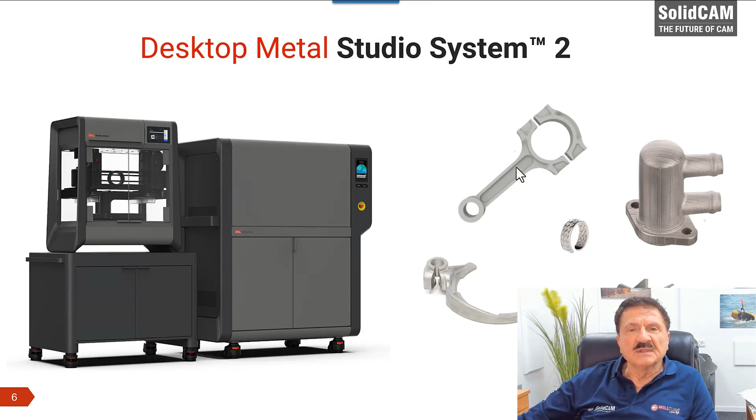The Desktop Metal Studio 2 system has two parts, the 3D printer and the furnace. It's an office-friendly production of metal prototypes and one-off parts. We share examples of parts produced with Studio 2: a gear fixture, an atomizer, and some gears.

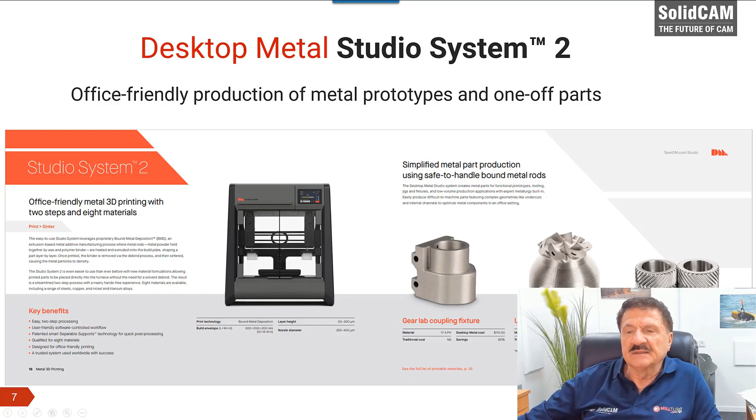Okay, what are the qualities of the Studio 2 system? First of all, it's an office-friendly metal 3D printing in just two steps: print and sinter. What about the printer? Unlike laser-based systems that selectively melt metal powder, the Studio system extrudes bound metal rods, similar to how an FDM printer works.

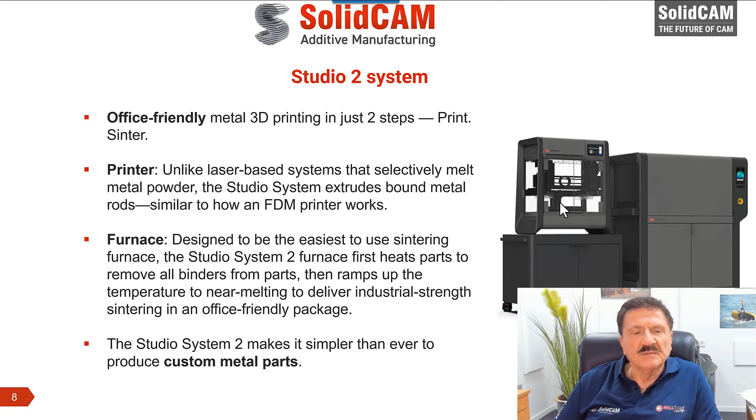About the furnace, it is designed to be the easiest to use sintering furnace. So the Studio 2 system furnace first heats parts to remove all binders from parts, then ramps up the temperature to near melting to deliver industrial strength sintering to an office-friendly package. So we can use the Studio system to produce custom metal parts. The second system that we are interested in is the Desktop Metal Shop system.

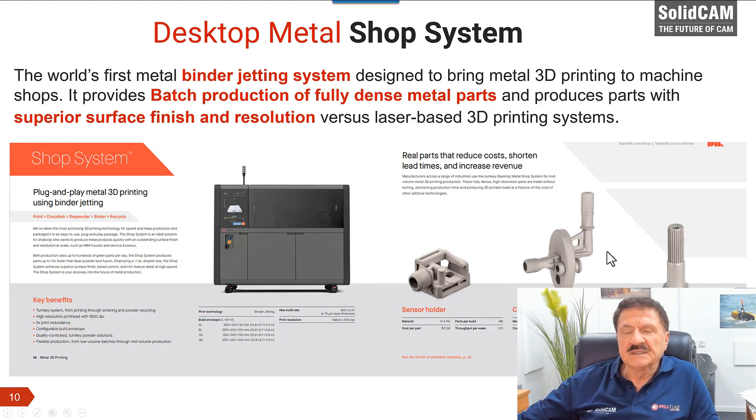This is the world's first metal binder jetting system, designed to bring metal 3D printing to machine shops. It provides batch production of fully dense metal parts and produces parts with superior surface finish and resolution versus laser-based 3D printing systems. See here on the bottom right examples of parts printed with the shop system.

The shop system printer features the most advanced printhead on the market with over 70,000 nozzles to achieve high-resolution 3D printed parts at a fraction of the cost of laser-based additive systems. Designed with the modern machine shop in mind, the shop system is built to fit seamlessly into the machine shop workflow. It produces parts with superior surface finish and resolution versus laser-based 3D printing.

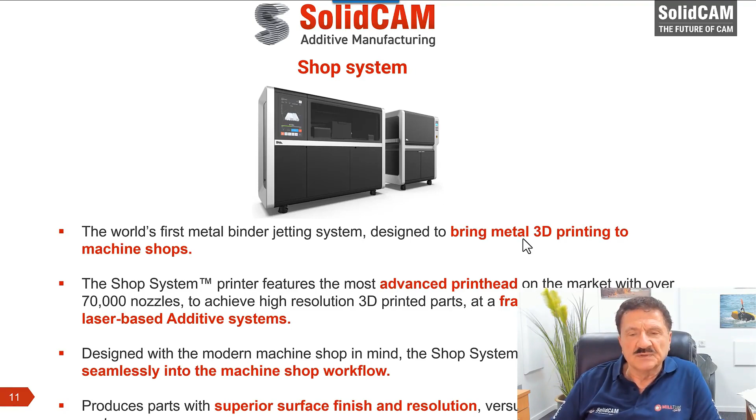What are the uses of additive manufacturing? First, rapid prototyping. Quickly 3D print functional prototypes and thus reduce product development timelines. The Studio system is perfect for this task.

Second, mass production. Produce hundreds of thousands of parts with no tooling required. The shop system is perfect for this purpose. And then the third use of additive manufacturing is manufacturing tooling, to simplify the manufacturing process and reduce lead times for end-use parts.

Desktop Metal have another line of equipment called ETEC systems. They have the ability to mass produce polymer parts with the speed and quality needed for demanding end-use applications. They deliver parts with exceptional accuracy, superior part properties, fine feature detail, and smooth surface finish, at a scale and cost that is competitive with traditional manufacturing techniques like injection molding. See here in the bottom right the different sizes of the ETEC systems.

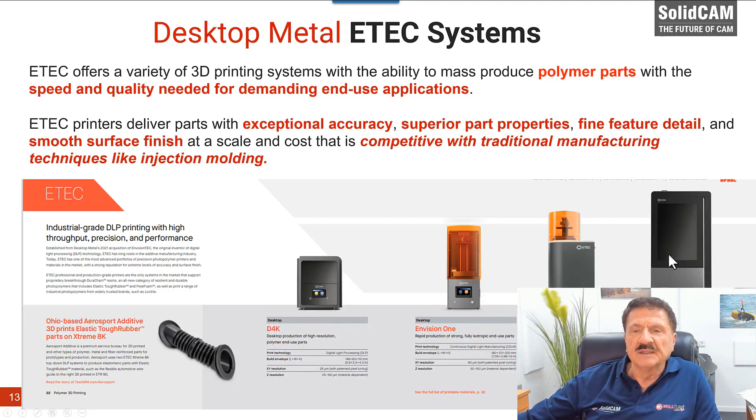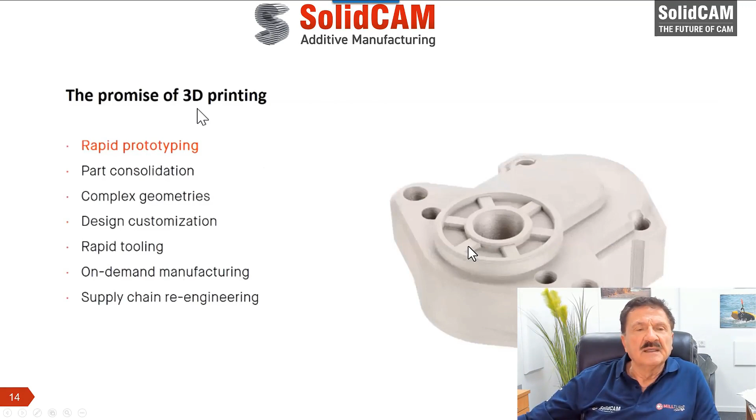So, to summarize, what are the uses for 3D printing? First, rapid prototyping. This has been the most common use for the last 20 years for 3D printing. Second is part consolidation. You see, sometimes to create an assembly, you have to CNC each part of the assembly and then combine them together to make the assembly.

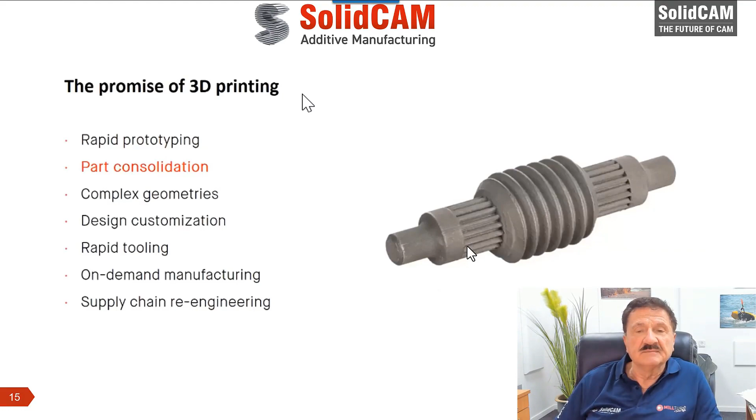In 3D printing, you could print the whole assembly as one piece. So it's a good example of part consolidation. With 3D printing, you can do complex geometries that can never be done through CNC. Here you see an example of such a part that was produced with 3D printing.

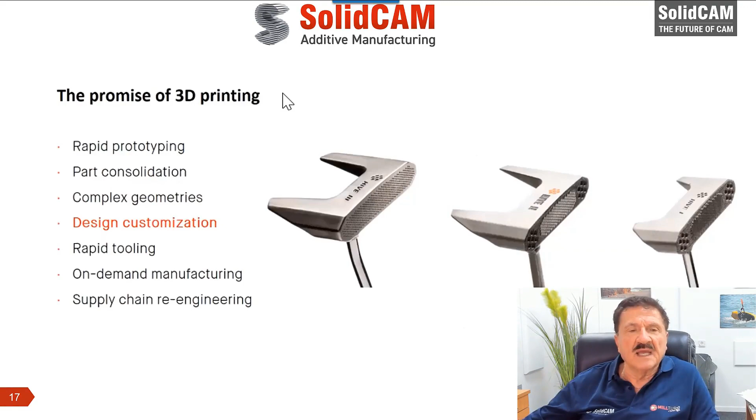Next, design customization. You know, these days when somebody makes a design and then does a prototype, he looks at it and then wants a change, and prints it again and again. So using 3D printing can help you do design customization. And as I mentioned before, with 3D printing you can produce rapid tooling.

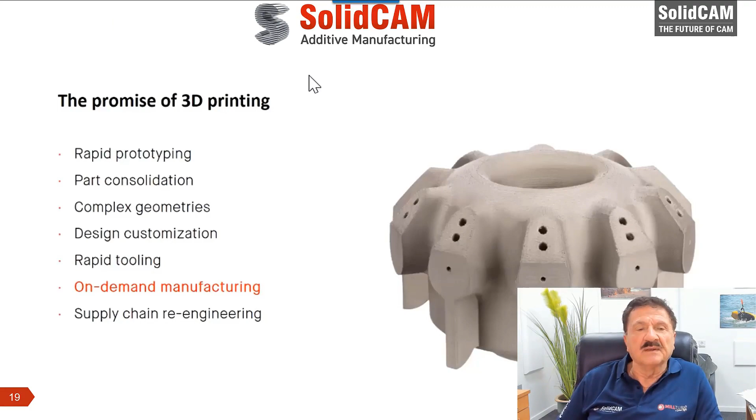On-demand manufacturing. So today, if you have the 3D model of the part and you have a location where you can 3D print it, you can simply, whenever you need a number of these parts, just 3D print them. That's what we call on-demand manufacturing.

Supply chain re-engineering. Basically today, you don't have to produce CNC parts in China and ship them to the United States. You can simply print them where you need them, in the United States.

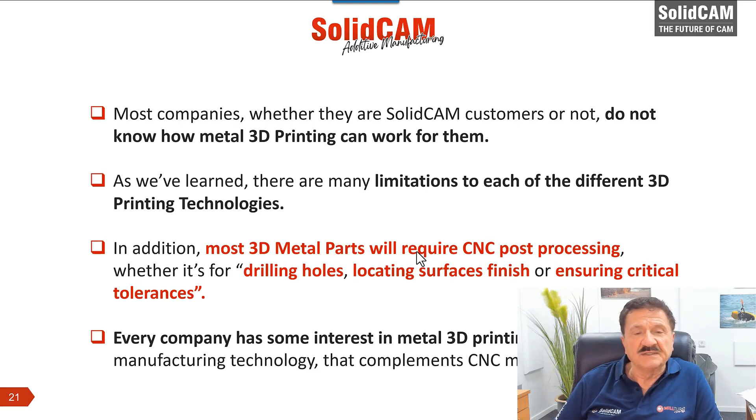So, to look at the complete picture, most companies today, whether they are SolidCAM customers or not—I'm talking about CNC machine shops—they really do not know how metal 3D printing can work for them. Also, as we've learned, there are many limitations to each of the different 3D printing technologies. In addition, most 3D metal parts will require CNC post-processing, whether it's for drilling holes, locating surfaces, finish, or ensuring critical tolerances. Basically, every machine shop or company that does manufacturing has some interest in metal 3D printing. It's a new manufacturing technology, and it complements CNC machining.

So, SolidCAM's task is to educate and guide its current CNC customers in 3D metal printing. We know the limitations and where this 3D printing technology excels. So, same as we provide practical technical support to SolidCAM customers for CNC machining, we offer the same for 3D metal printing. We can investigate a part and decide whether this can be done with 3D metal printing or not, and how much cost saving can be achieved with 3D metal printing, and what CNC post-processing is required.

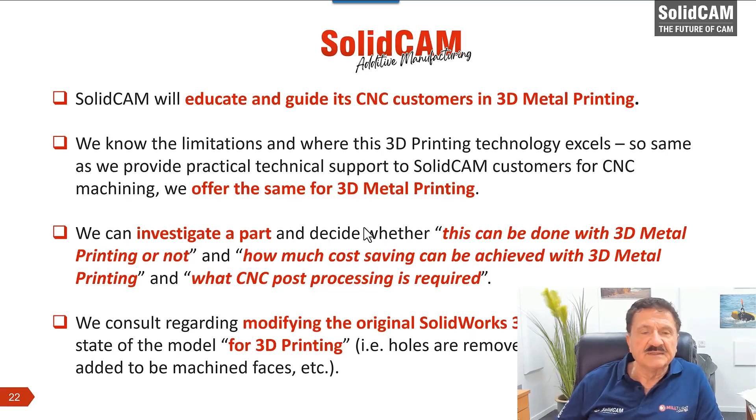We can also consult companies regarding modifying the original SolidWorks design model, so we get a state of the model ready for 3D printing. This means holes are removed, additional material added to the machined faces, and other changes.

So, how are we going to interact with our current customer? By taking real parts from you, we investigate how to integrate 3D printing in the process to manufacture your parts. There are several different approaches. We just get parts from you for the purpose of studying them and understanding where 3D printing can be useful. We can also 3D print parts for you as a service in our additive and CNC technology centers.

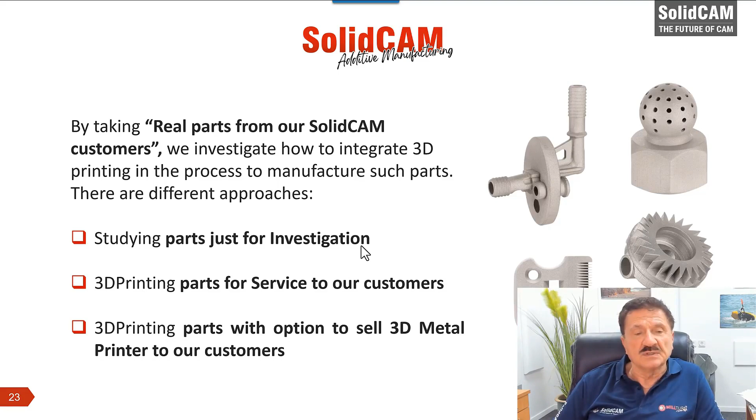Also, once you see the value of 3D printing, we can obviously also sell you the 3D printer system. A customer of SolidCAM in Germany called VMR gives services ranging from 3D printing with metal and additive manufacturing in plastic to design, mold making and plastic injection molding, to CNC machining with milling and turning. VMR has 9 seats of SolidCAM and does metal 3D printing since 2014 with SLM and Renishaw laser metal printers.

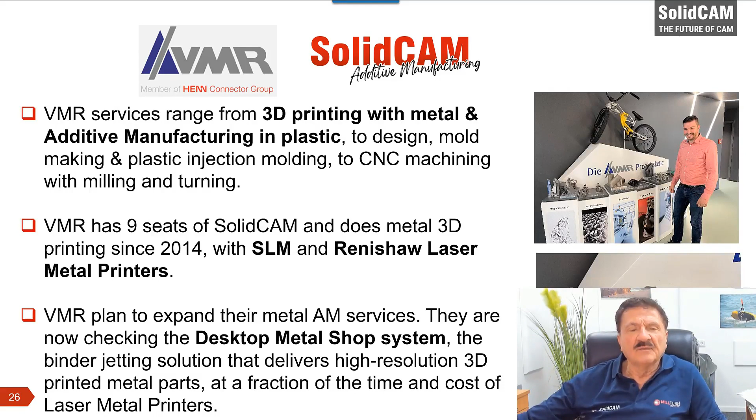VMR plans to expand their metal AM services. They are now checking the Desktop Metal Shop System, the binder jetting solution that delivers high resolution 3D printed metal parts at a fraction of the time and cost of laser metal printers.

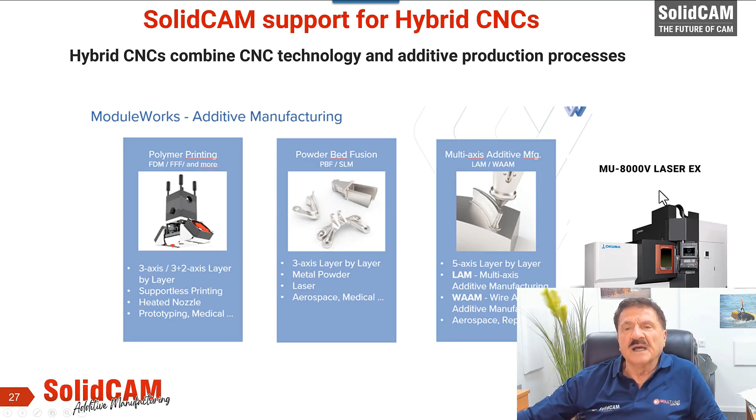Another area we are developing in SolidCAM is support for hybrid CNCs. Hybrid CNCs combine CNC technology and additive production processes. They have basically a regular milling head, and they also have a laser head to do 3D printing. We are going to support polymer printing, powder bed fusion, and also multi-axis additive manufacturing. You see here on the right the Okuma MU-8000V Laser EX, an example of a hybrid CNC machine.

Here is an example of one of those centers, our SolidCAM CNC plus additive Schramberg Technology Center. It's in the city of Schramberg, 1 hour south of Stuttgart in Germany. Here we see on the left the Shop System installed there. We see on the right the Studio System, and on the bottom right other components of the Shop System.

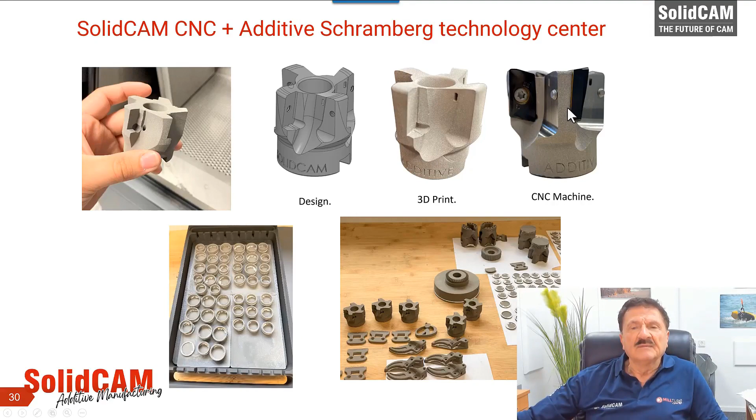You see here what we can do, the whole process which involves designing a custom tool. Here is a picture of the design, done in SolidWorks. Then we 3D printed it with the Shop System, and then we did CNC machining for creating holes and finishing surfaces.

Let's see now a video of this whole process of a custom cutting tool from design to finished part.

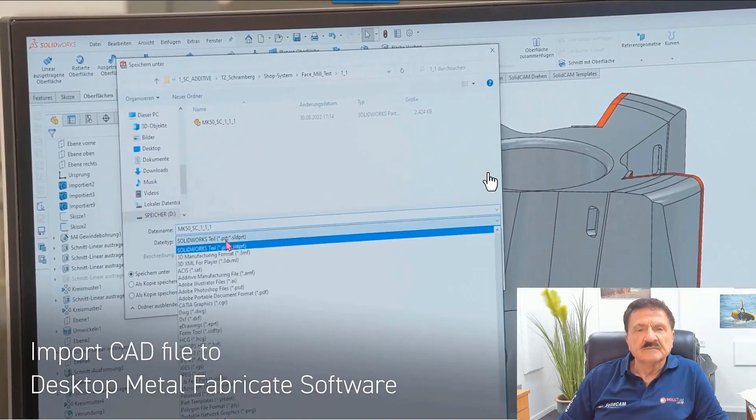Here we see the design of the custom tool in SolidWorks, preparing it for the Shop System.

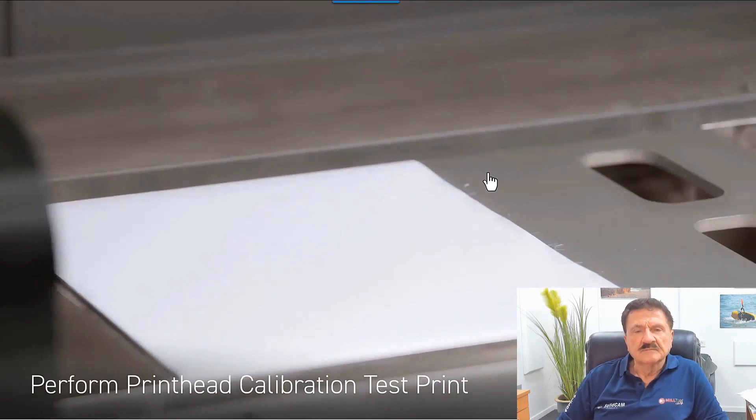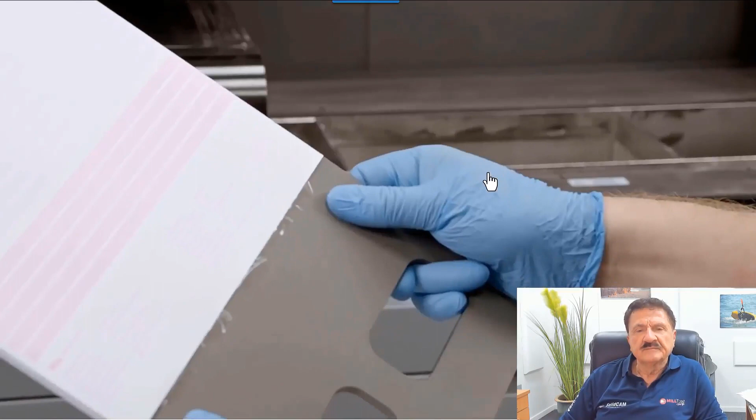This is the Shop System that has 70,000 nozzles that I explained. Here we're starting to print the parts.

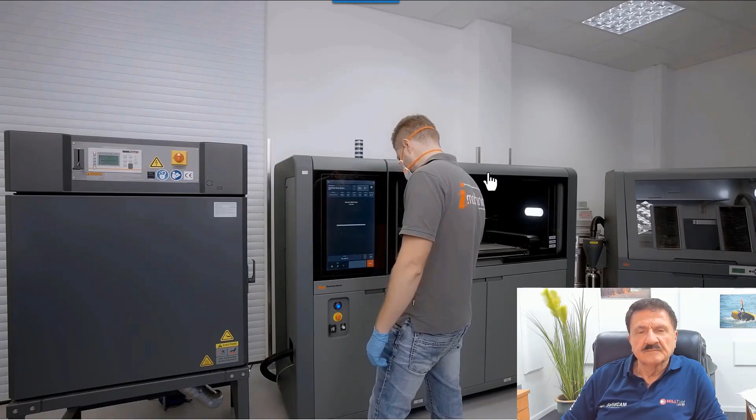Now we transfer the printed part to the drying oven.

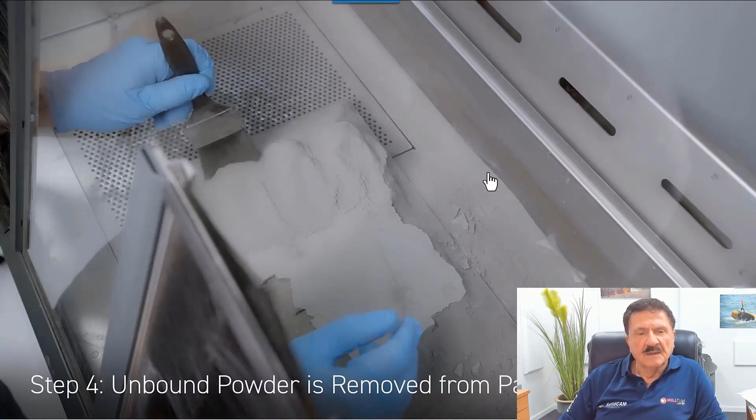Now we remove the unbound powder.

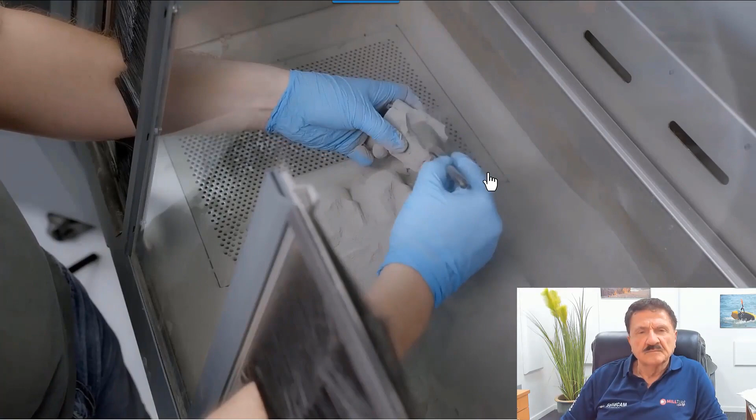Now the parts are ready for sintering in the furnace.

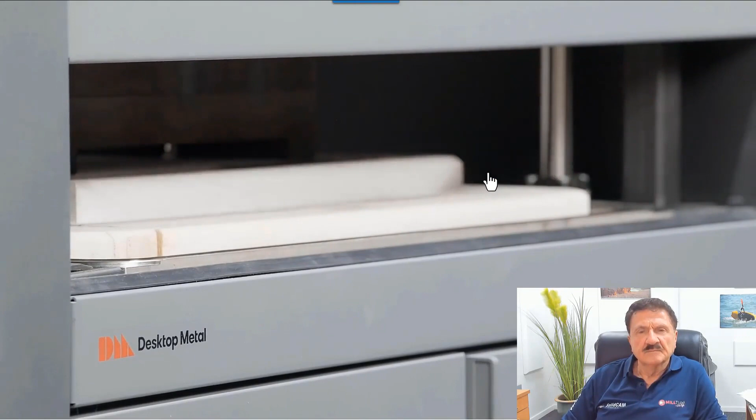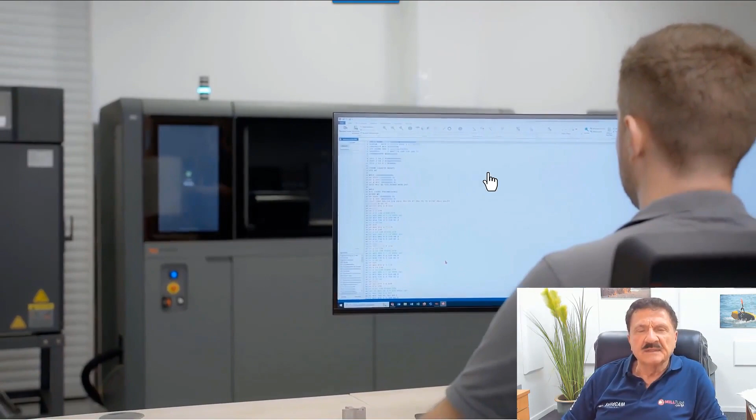Now we come to the last stage of doing CNC post-processing. We do the CAM part programming in SolidCAM, and now we take it to the CNC machine to do the actual post-processing.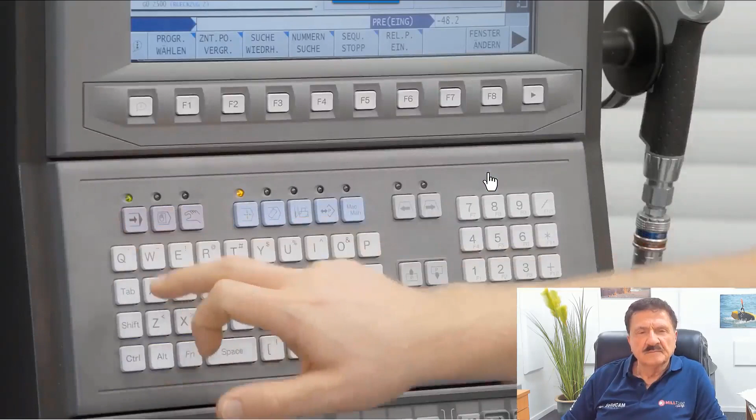Here we are preparing the surface finish for the insert. Now we are drilling the hole for the insert.

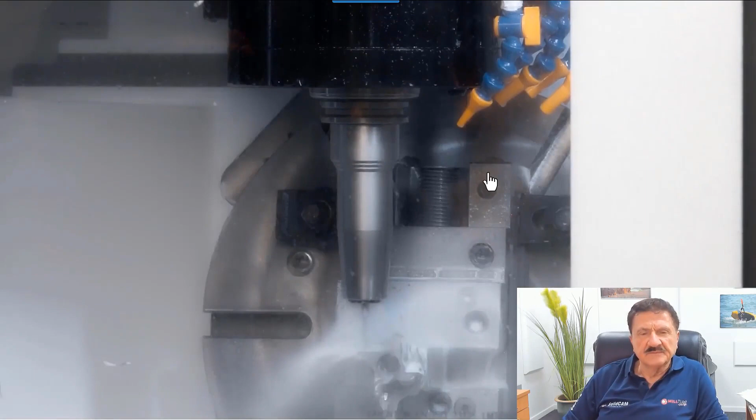The end-use part is ready for use. Enjoy the rest of the webinar.

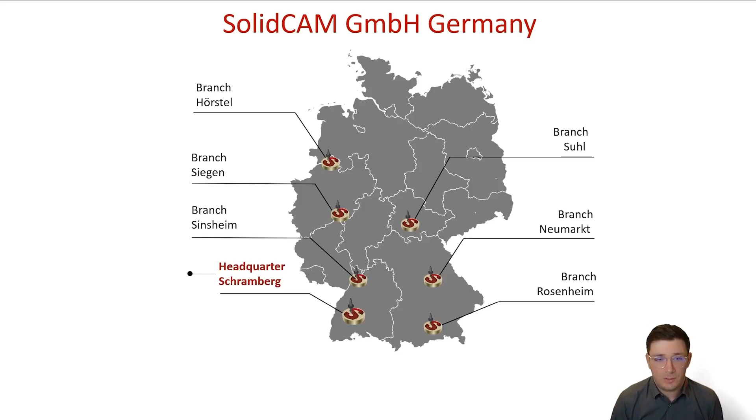Recently we have also introduced additive manufacturing in these technology centers. So what we have added, in combination with our Hermle C30U, our DMG NTX 1000, and our Citizen L20 ATC, is a Desktop Metal Studio 2 system and a Desktop Metal Shop system. And in 2 or 3 weeks we are getting an ETEC Envision OneXL and an ETEC D4K.

That means we can now show the full process: designing a part, printing it, putting it in the furnace, and then doing the CNC post-processing. This is something we are really proud of because we can show this all in one environment. So we can take our customers by the hand and tell them exactly what you need to know.

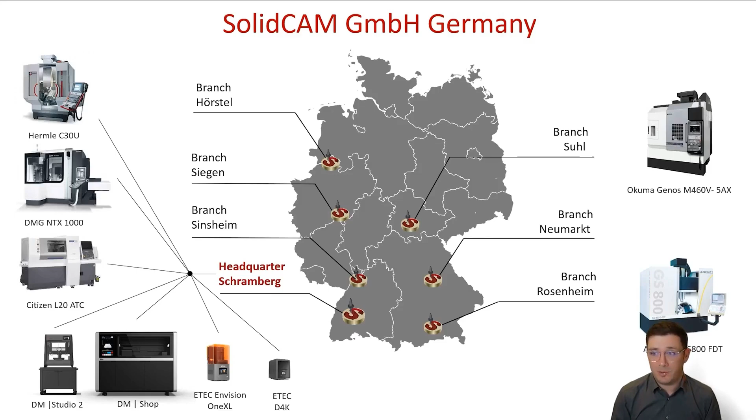A little bit more facts about SolidCAM Germany. We have 74 staff, and what's really interesting is that 28 of those 74 are application engineers in CAM and additive manufacturing. We have more than 4,000 customers in Germany, Austria, and Switzerland, and we are really proud to have almost 13,000 educational seats as well. Especially in the educational area, additive manufacturing is going to be really important in the future.

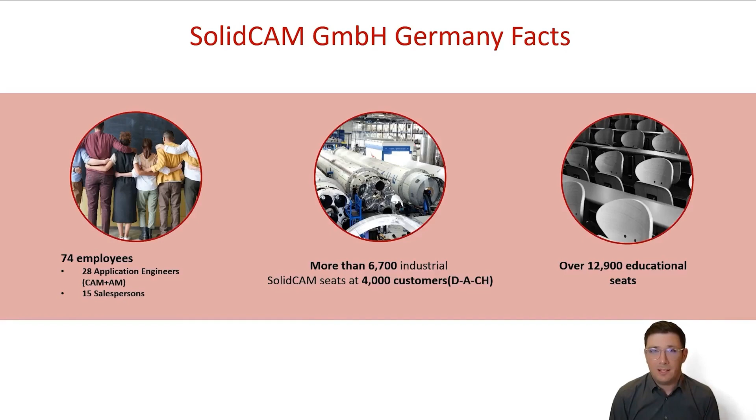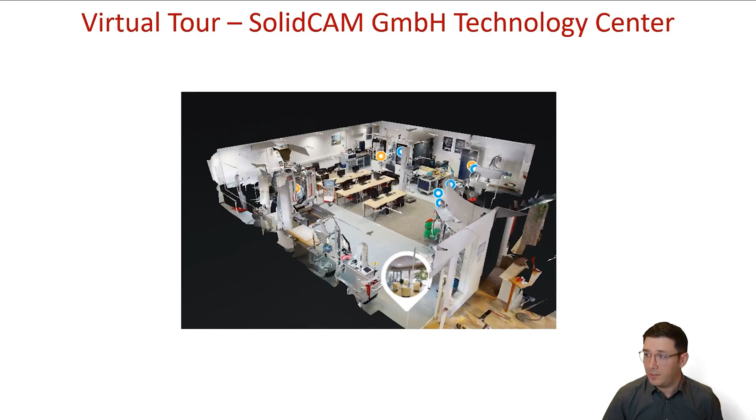Let me give you a small virtual tour of our technology center in Germany. Let's zoom in a little bit more here. When we enter our building, we are standing directly in front of our Hermle C30U 5-axis machine.

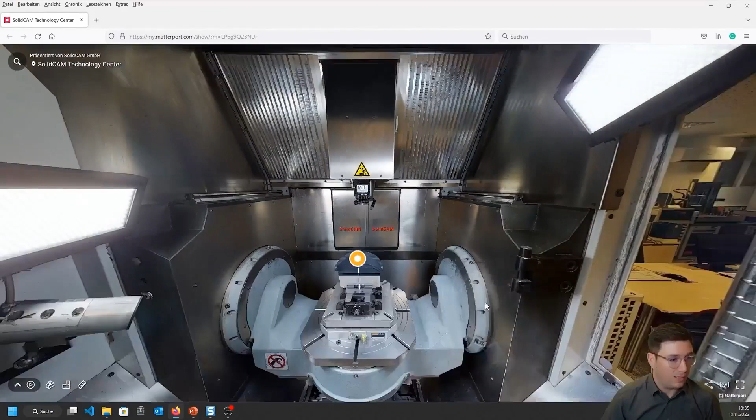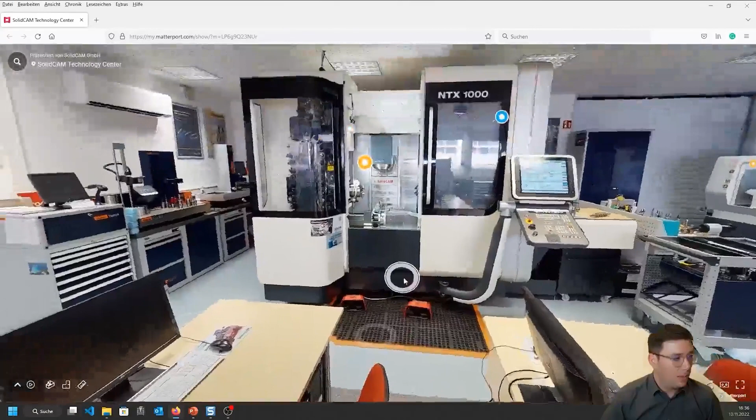As you know, A-C axis, spindle, pretty straightforward—it has a Heidenhain controller on it, which is pretty nice. Then let's zoom out a little. Let's try to go to our NTX here. It is a 2-channel machine with a Siemens controller. We have a B-axis, a rotary turret, a lower rotary turret, a main spindle, and a back spindle.

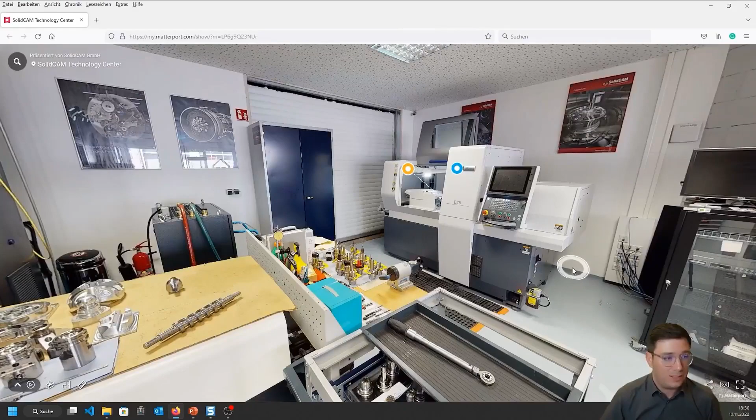At the corner here we see a Citizen D25. Meanwhile this machine is going to be replaced by a Citizen L20 ATC. And at the back side here, where this wall is in the 3D scan, there is the breakthrough to our additive technology center. So let me show you how this looks like, because we haven't scanned it yet.

When you enter the room, you see the Desktop Metal Shop system here on the right side, and we also placed, as I mentioned earlier, the Desktop Metal Studio 2 system in it. You know, those printers run almost every day.

We print prototypes and functional parts, like we have seen earlier with the cutting tool. There are actually no limits. We are exploring daily, and our customers approach us—they give us parts, we print them, we try to redesign the parts with our customers. So there are no limits, and we can now produce parts that we would never have dreamed of before. It's absolutely worth seeing and a great added value for our customers.

So if there is any chance for you to visit one of our technology centers in the future, visit us. It's worth it, believe me.

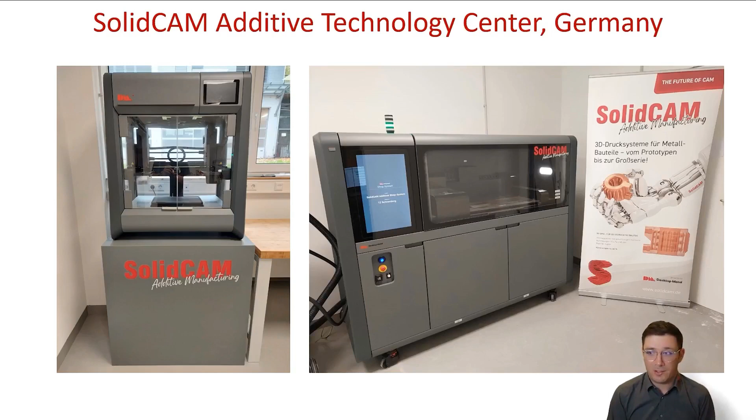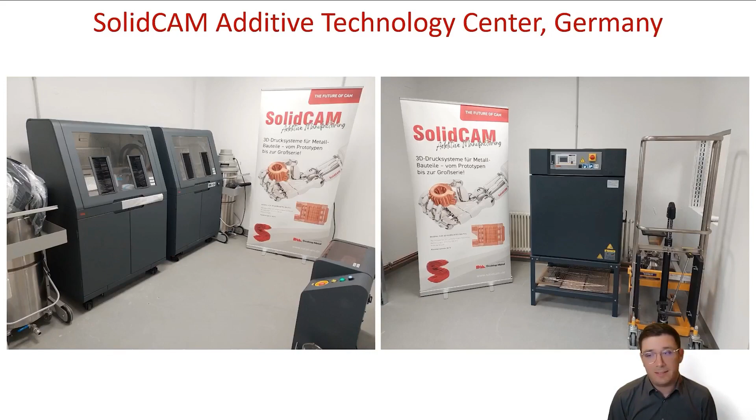There are also some peripherals that we need. On the left side, you can see the depowder stations, and on the right side, you can see the drying oven, which is used to activate the binder after the binder jetting process. And then, of course, we need to remove the excess powder, and it can be completely recycled.

That means there is no unnecessary waste of powder, as is the case, for example, with laser sintering. So one more time, I want to mention it. What we are doing right now in Germany is to educate ourselves and to educate our customers. So this plan is very clear.

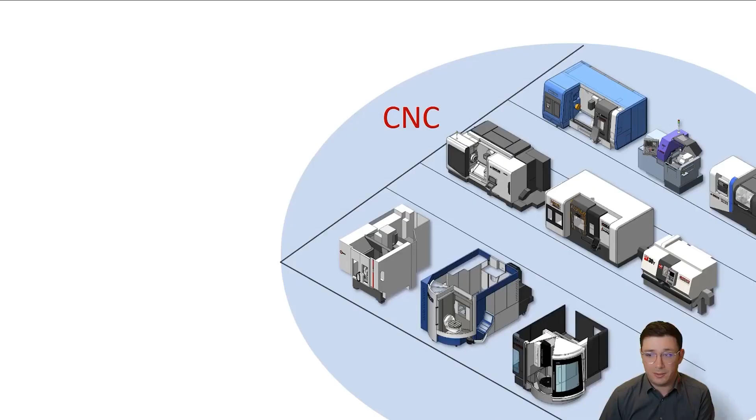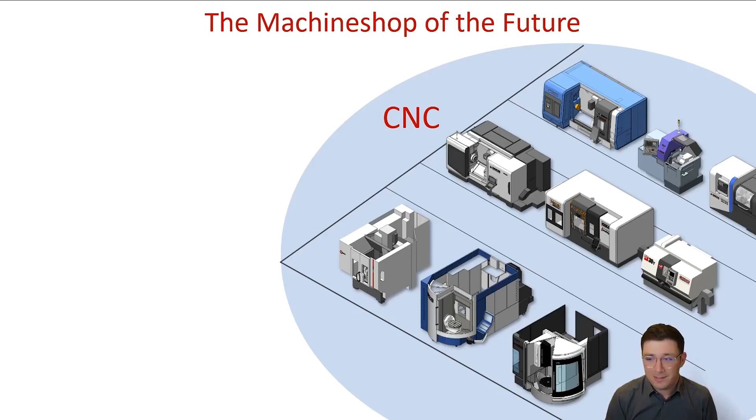So what does a CNC production or a CNC machine shop look like today? Well, it's quite simple, we all know it. We have different machines: milling, turning, Swiss type. But there's a new player in this game, namely additive manufacturing. So let's put that right next to the CNC machines just for this illustration. So we have those two technologies here, and we have to combine them.

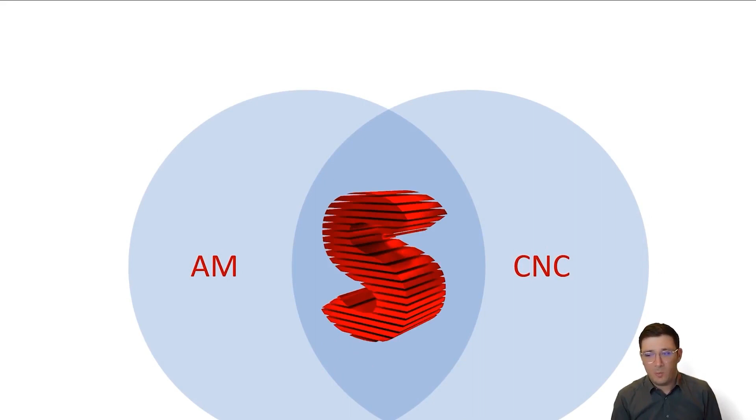And in the intersection in the middle, that's exactly where SolidCAM Additive is. We are the link between additive manufacturing and the CNC manufacturing companies out there.

Last but not least, I would like to show a picture of the additive team, the team for the trade show here, which was called METAV. We were also supported by really nice people from Desktop Metal. Beautiful exhibition, we saw so many people approaching us and asking about 3D printing. It was quite awesome.

And what should not be missing in a good webinar from Germany? Of course, a short report of the most important trade show we have, which is the AMB, where we showcased our whole process, including additive manufacturing, for the first time. Enjoy.

Hi and welcome to the AMB 2022 here in beautiful Stuttgart. The AMB in Stuttgart is for us one of the most important exhibitions that we have.

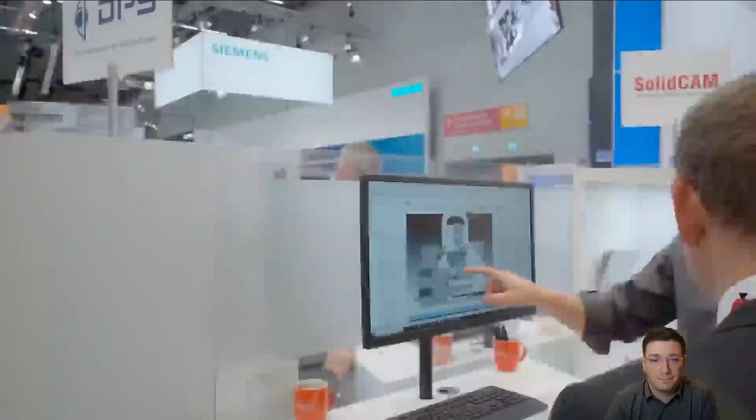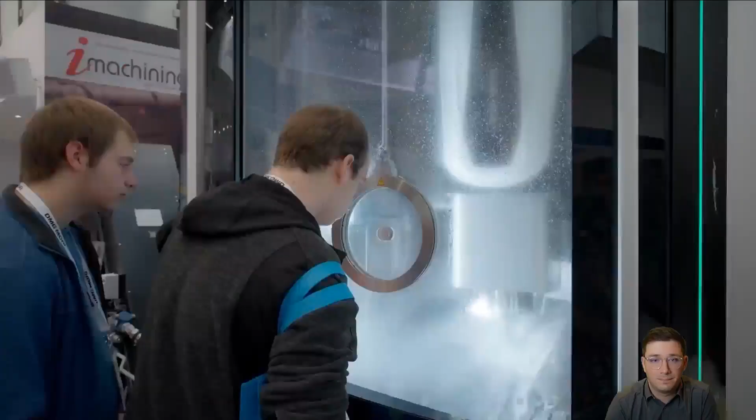On AMB 2022, we utilized two machines. The first is a DMU 60 Evo Linear. On this machine, we are manufacturing a really important part for us: our technology center in Schramberg, which is also the headquarters of SolidCAM Germany. You can see clearly on this part that it's really hard to machine. You have deep undercuts, you need long tools, and you also need barrel cutters to finish this part.

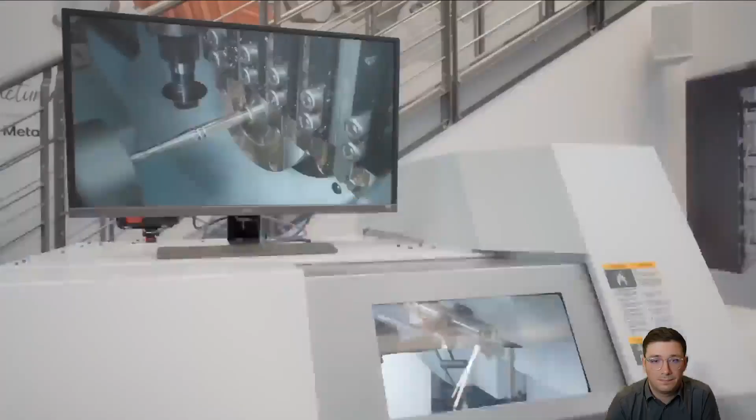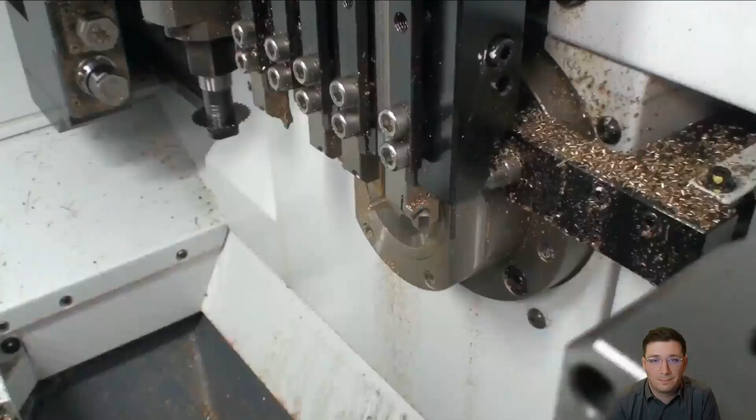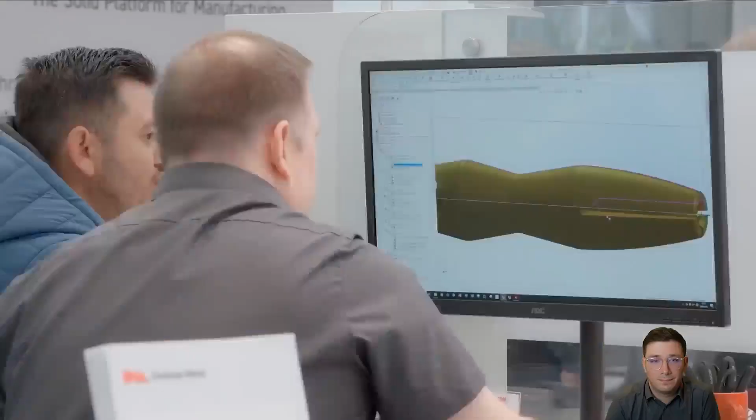Next on our booth, we have another technology, which is Swiss type. On Swiss type machines, it is always really hard to make sure that you're not having collisions. So we built a system over the last couple of years to program these machines in the best and easiest possible way. In this case, we have a Citizen L20 ATC, one of the first machines that has a tool changing mechanism for the B-axis. The part we are doing on this machine is a dart. This dart is a part that is really meant to be machined on a Swiss type machine. Of course, it's a show part, but it is long, it is thin, and you need Swiss type machines to program parts like this.

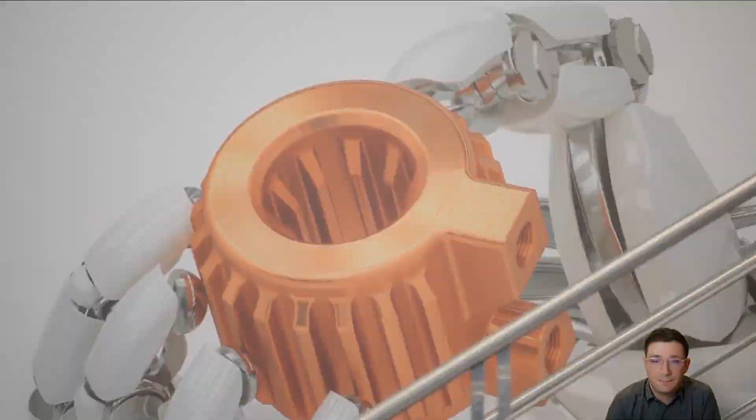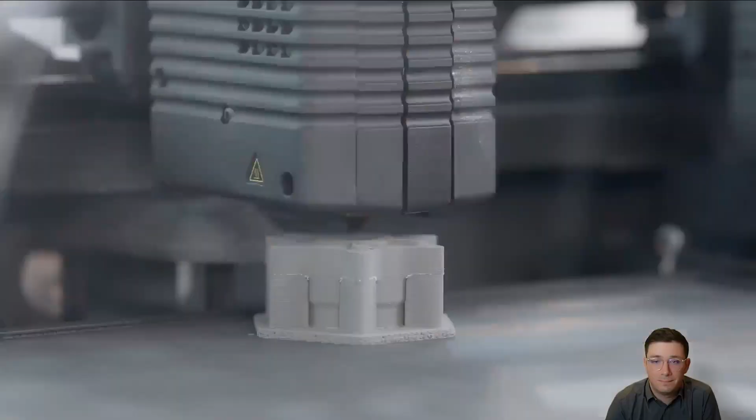Next, it's a world premiere what we are doing here. We are showcasing our approach to additive manufacturing. Additive manufacturing is one of the most important technologies in the future, and I believe that this technology will be placed in a lot of machine shops, or almost any machine shop, in the future, because the printers get cheaper, they are faster, and the parts they make are really accurate.

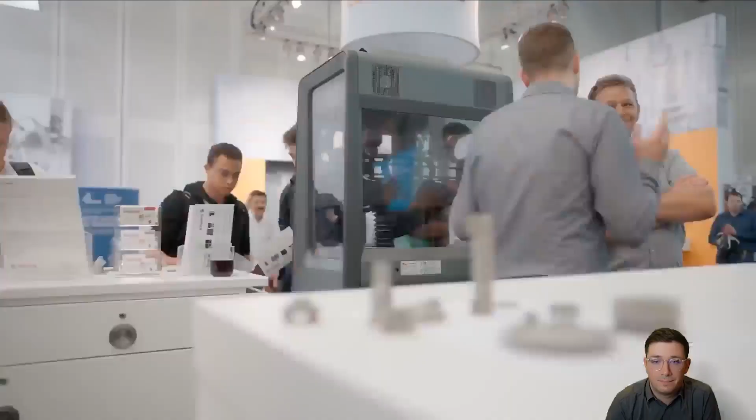For example, what we see here is the Desktop Metal Studio System. The Desktop Metal Studio System is meant to produce prototypes, it's meant for small batches. Also some repair shops that are doing spare parts, this product is perfect for them.

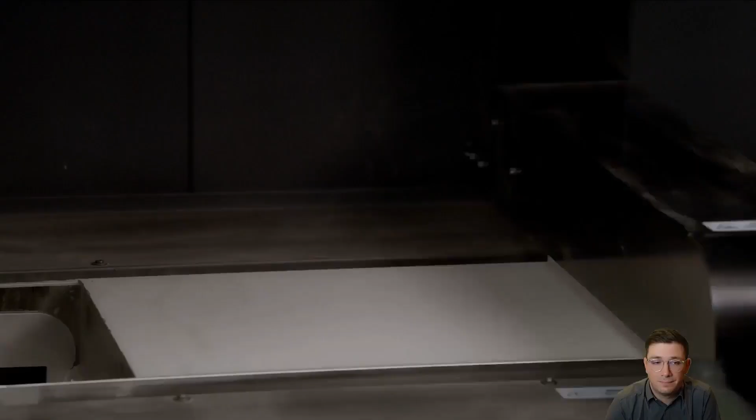On the other side, back there, we see the Desktop Metal Shop System. The Desktop Metal Shop System is the first binder jetting system that is commercially available on the market. In binder jetting, compared to the Studio System, it's not about single parts or spare parts, it's about mass production of metal parts. And when we talk about mass production, of course, we target the CNC sector. The CNC sector is always needed to post-process parts like this, because we have tight tolerances and surfaces that need to be machined. So it's the perfect fit for CNC manufacturing, the Desktop Metal Shop System.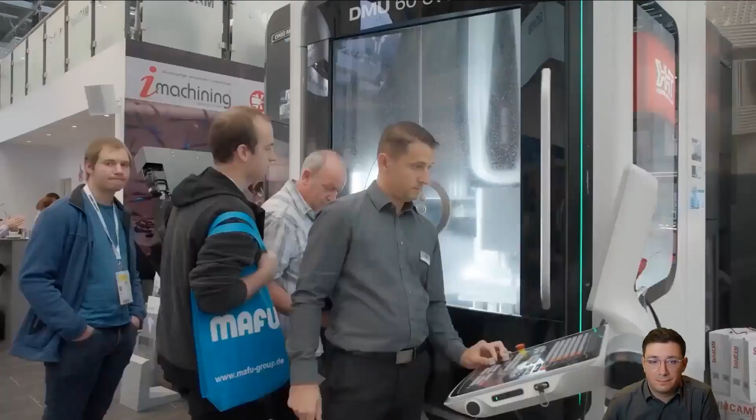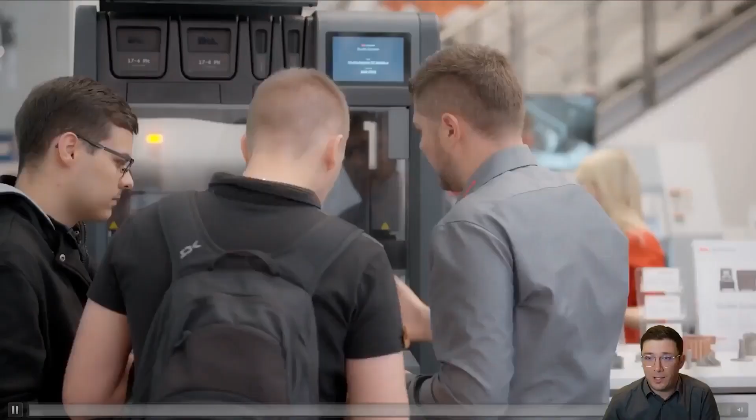All right, what a nice video. So let's design the future together and make it real. Thank you for your attention.

I hope everybody enjoyed listening to Michael's overview of Germany. Obviously, they have a very impressive and technologically advanced group of people over there and facilities, so it's always awesome to see what they do there. I think now we're going to move on to the Q&A section.

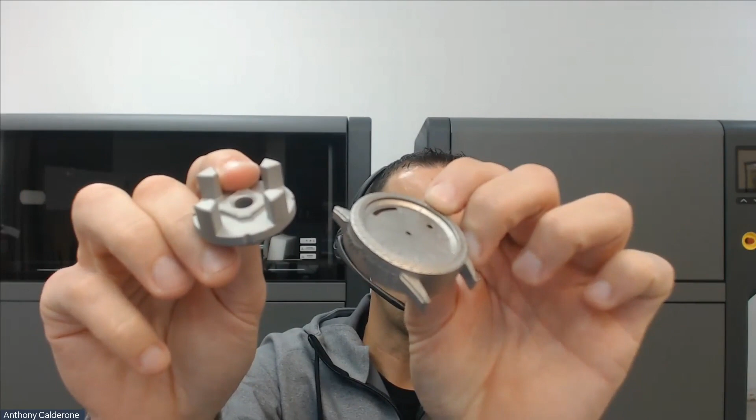I do actually have... wait, is this watch face? Yeah, so this is like a watch face, and you can see a little shine to it—this was just tumbled. If I hold up both at the same time, the webcam probably doesn't do an awesome job with this, but you can see the watch face has a little more shine to it, where the part that just comes out is a little duller. But your options are pretty much the same.

All right, why is 1 inch thickness the upper limit? That's an awesome question, one I had to have our AM experts explain to me, because just like everybody here, I'm kind of new into 3D printing, so I am by far not an expert. A material scientist at DM would probably roll over in his grave hearing my explanation, but basically what we have is a binder in the material. Whether it's the rod-based filament system for Studio, or a powder, there is a binder, and that binder is not metal—it's not our stainless, not our titanium, not our copper. It exists only to 3D print the part.

We have to remove all of that binder. It needs to be removed, or else it wouldn't be stainless if there was other material in it, such as the binder. So what happens is 1 inch wall thickness is about the limit where, in the sintering process, the binder can actually evaporate—or permeate or escape—out of the metal part. If you think about a 1 inch wall thickness, all the way in the middle there's a glue, which is basically what the binder is. So in the furnace, it needs to heat the metal up to such a point that the binder fully escapes, so there is no binder left in the part.